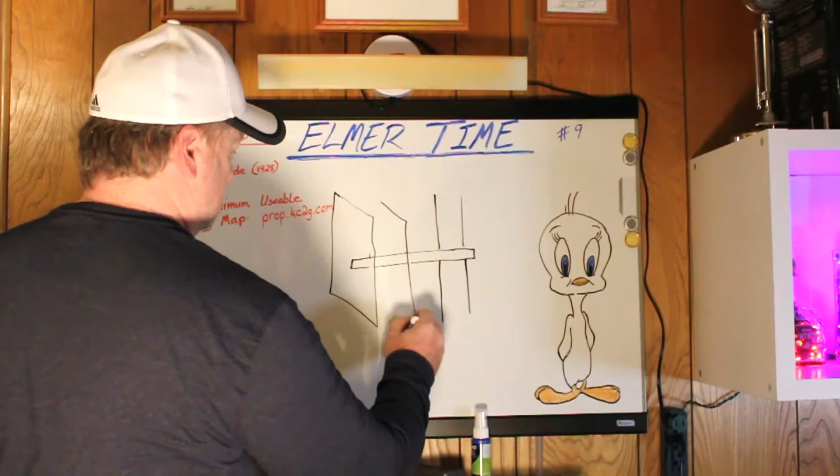Thus bringing up the gain, making it more sensitive to receive, and lower noise. Let's take these elements out. And let's just say it was, see, how would we draw that? Something like that.

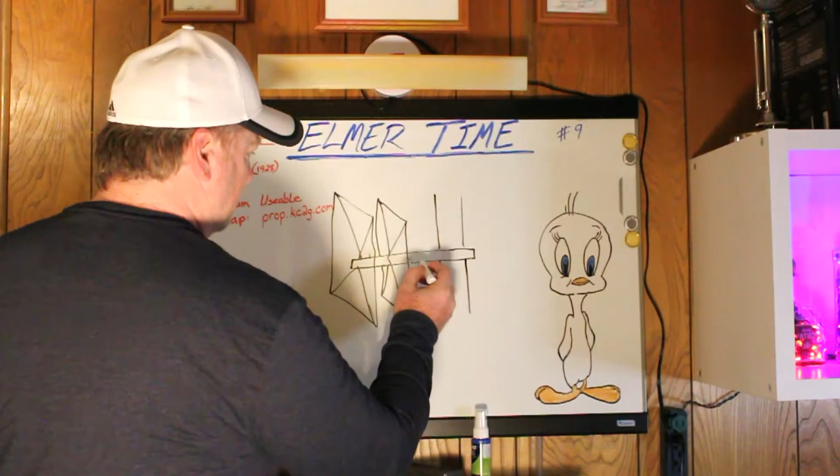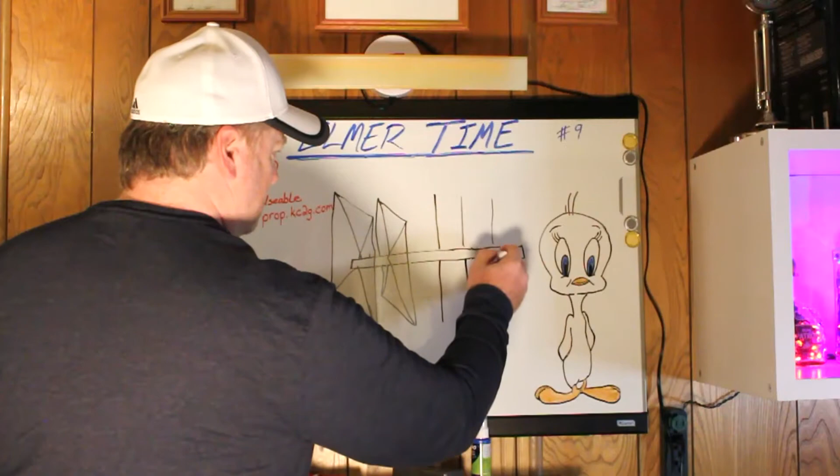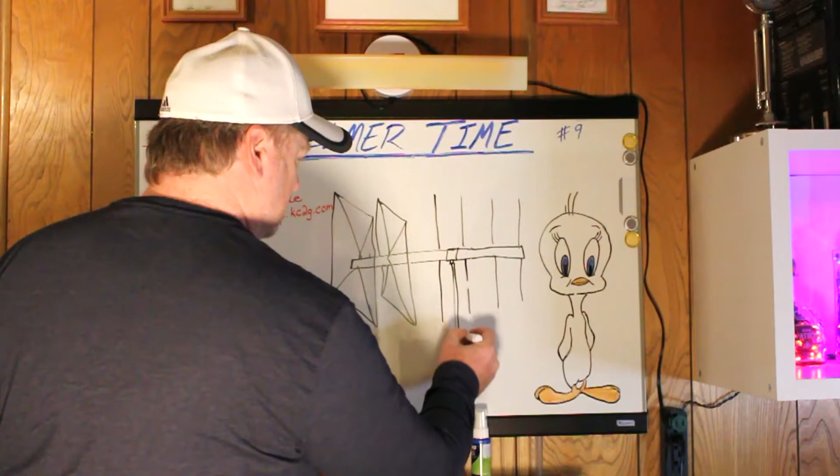Very easy to make, inexpensive. We can even make it longer. Let's make this with more elements, more gain, more directivity. What say you if we made a cheap one out of PVC, wooden dowels, copper wire, an SO239, and some copper or brass rods?

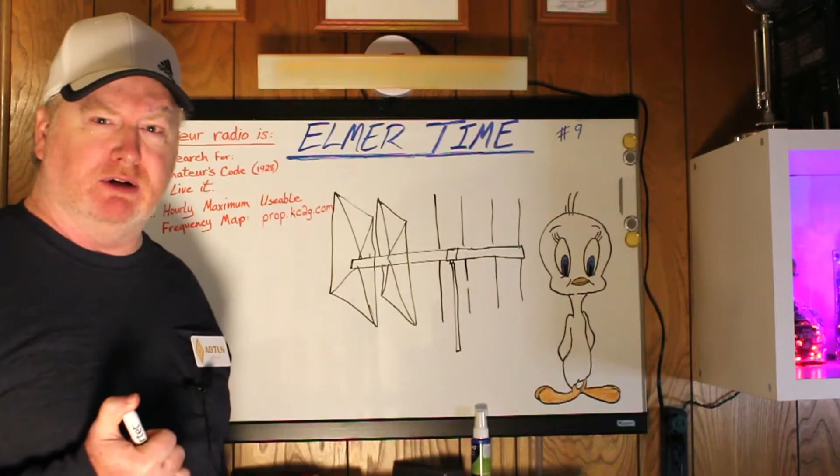Somewhere in the ballpark of 11 to 15 dBd gain, and it's less than 10 feet long. If you're interested, keep watching.

Well, how about we make a 146 megahertz 6-element side-fed Quagi. High performance, in less than 10 feet long, part quad, part Yagi, lower noise than a Yagi, higher gain than a Yagi.

Yes, it has a higher wind load, so you may not want to leave it out all the time, considering this is an antenna constructed of PVC, wood. But gosh, it's a great antenna. I made this antenna many years ago, and I had a ball with it. So let's start off with the construction of this 6-element Quagi.

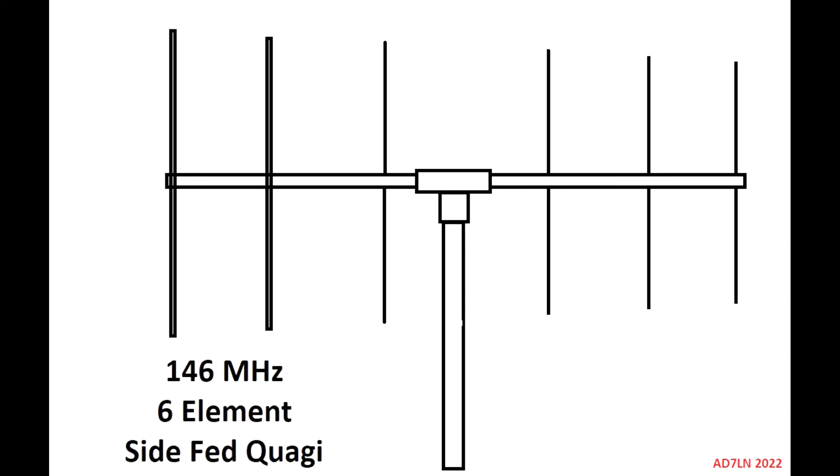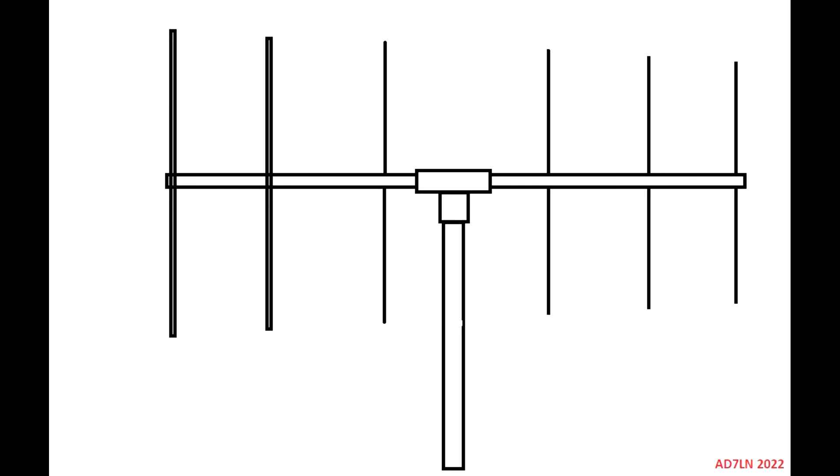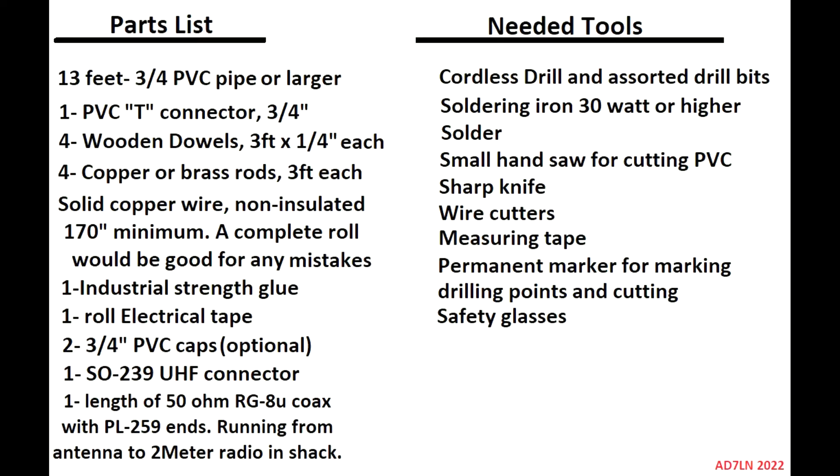Beginning, you will need a parts list. So here I have typed out everything that's needed for a parts list and the needed tools to construct the antenna. At any time, go ahead and pause parts of this video if you plan on taking notes or building this antenna. So let's move on with the next part of the slide here.

So starting off, let's cut the directors to their appropriate lengths. Whether you purchased copper rods or brass, they don't have to be very large in diameter. They can be less than a quarter of an inch round. Something that'll easily fit inside and through the PVC tubing during construction.

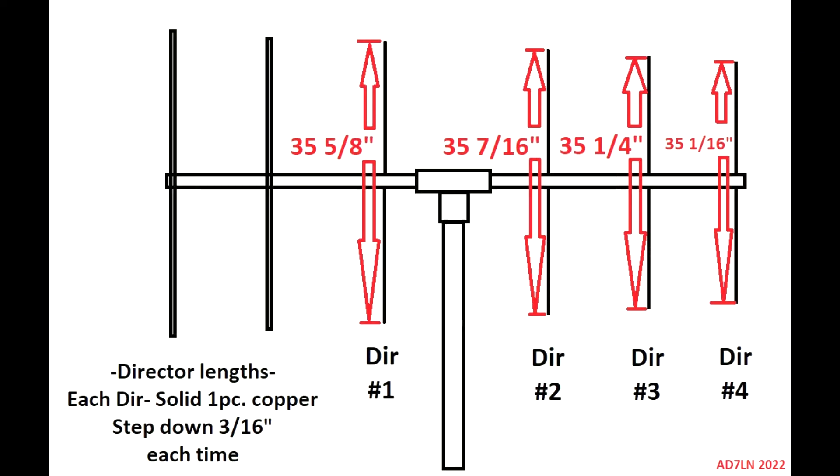Here are the lengths. Director 1 is 35 5/8 inches long. Director 2 is 35 7/16 inches. And Director 3, 35 1/4 inches. Director 4 shows 35 1/16. So once you have cut those, it'll be time to start making the driven element and the reflector.

And all these are just made out of solid copper wire, non-insulated, and you just bend the wire into a square. The reflector will be a closed loop, closed as in soldered together, and the length of the wire to make that reflector is going to be 85 3/4 inches long.

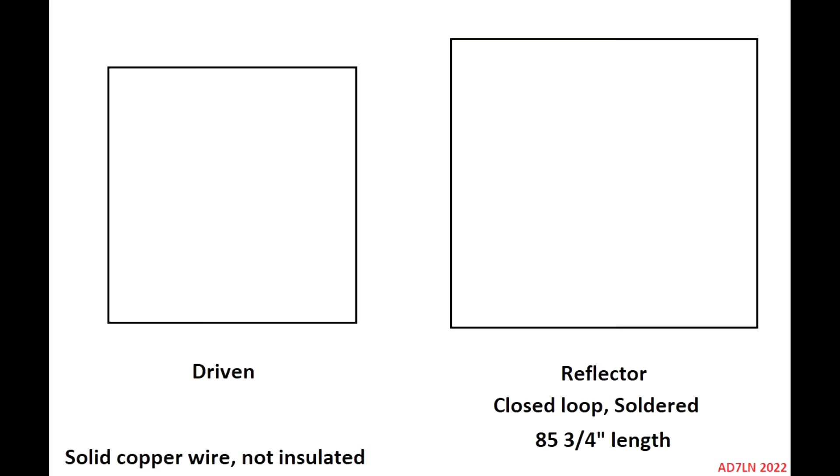And each side, shown in this next slide, is going to be 21.43 inches long. And they are exactly the same, 21.43, 21.43, 21.43. Once you have a perfect square, you will cut and solder and make a closed loop.

Once you've finished the reflector, move on to the driven element, which is 81 inches long. And the square becomes 20 1/4 inches for each side. And you will notice on the right side of the driven element, there's where you want to end and start the wire, because you're going to put an SO239 right there and solder the SO239 onto the wire. That will be your driven element.

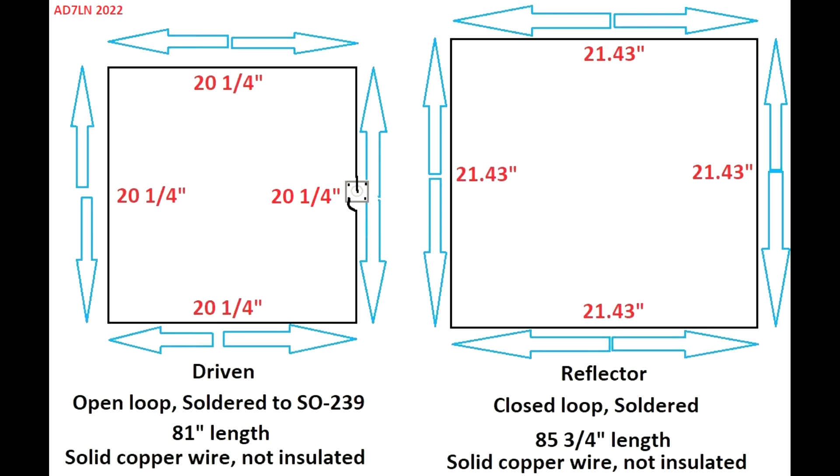And just to take a closer look at this, it shows the top wire is where you're going to solder the center conductor of that SO239, and the bottom wire that runs up to the connector, that will be the ground.

You will want to, during construction, put this on the right hand side of the driven element, so that once it's completed, you will flip it over, and the threaded socket will be on the left-hand side, facing you, because that's the way it's going to be further on as we get into this antenna.

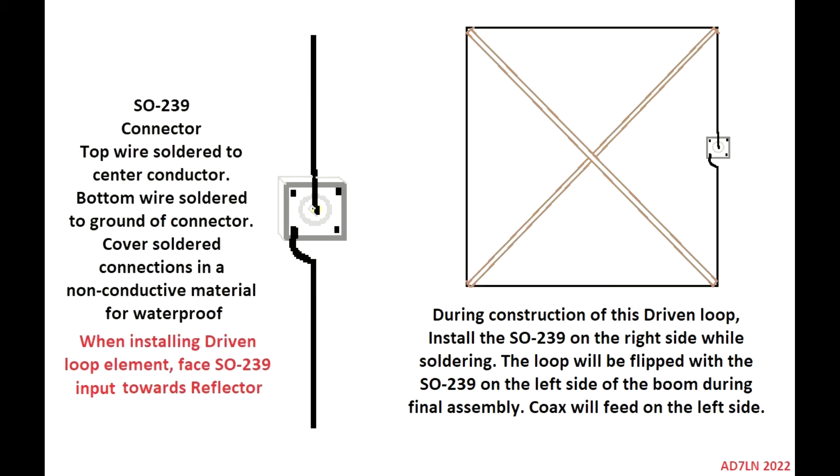So, next, we will get out the wooden dowels to make the supports for both the driven and the reflector. Cut down the dowels so that they are holding the wires perfectly without stretching the wire. And once you have them perfectly cut down, don't glue them immediately to the wires, because you need to install those dowels into the PVC boom of the antenna.

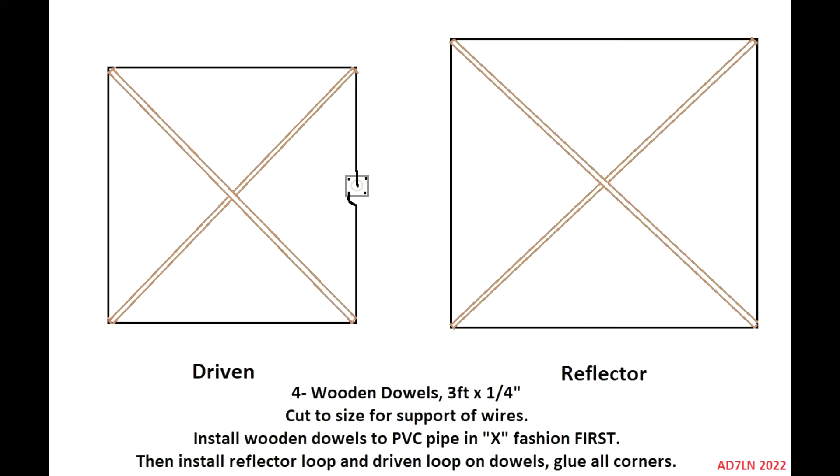Then you will put the wires on the wooden mast, or the wooden dowels. So next, we can start on the PVC itself. As you can see, you need to get out the T connector and then put in PVC on both sides so that it equals out to 112 inches. You may notice that one side may be a tad longer than the other, so do the measurements prior to cutting.

It also shows where the drill points are going to be. If you start off, let's say, on the right hand side, the number 4 director, you would drill a hole fairly close to the end, and that will be your starting point. And then 25 3/4 inches in, you'll do another drill point for director 3. Another drill point further in would be 17 1/4 inches. That would be director number 2.

And then between director 2 and director 1, you will have that space where the T connector is. So between director 1 and director 2, you have to make sure that once you have applied the PVC boom into the T connector, that you can drill the next point at 32 3/4 inches for your director 1. And then after you've done that, the driven is going to be 15 1/2 inches away from director 1. And then between the driven and the reflector, that'll be 20 3/4 inches.

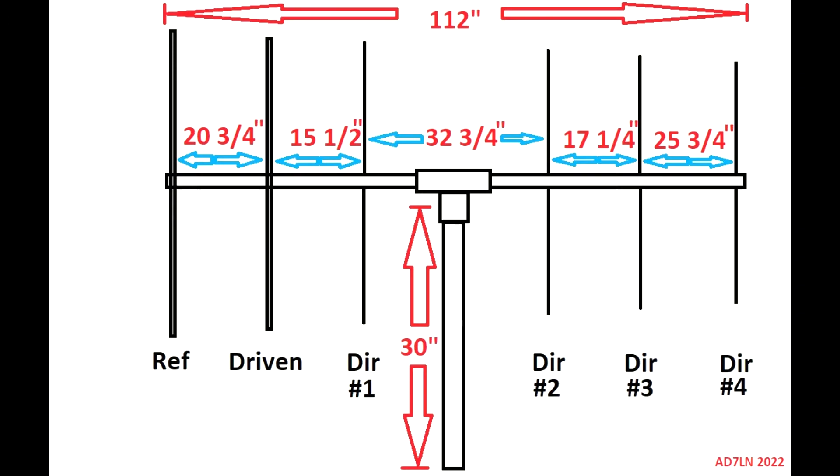And you should have some PVC piping left over to use as your mast to suspend or hold up the antenna once it's created. So from there, we can show you a little more in-depth on the drilling practice. You want to make sure that every director hole is straight in line with each other. For the directors to work properly, they have to be exactly in front of each other. So make sure you do your measuring and marking properly before drilling for your directors.

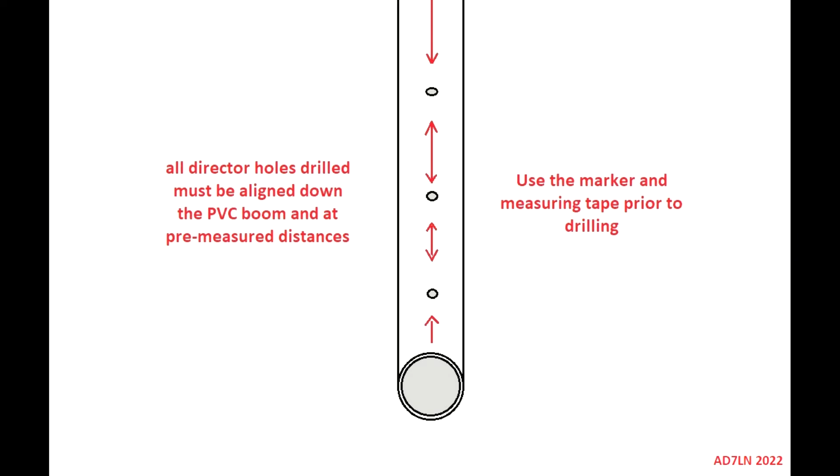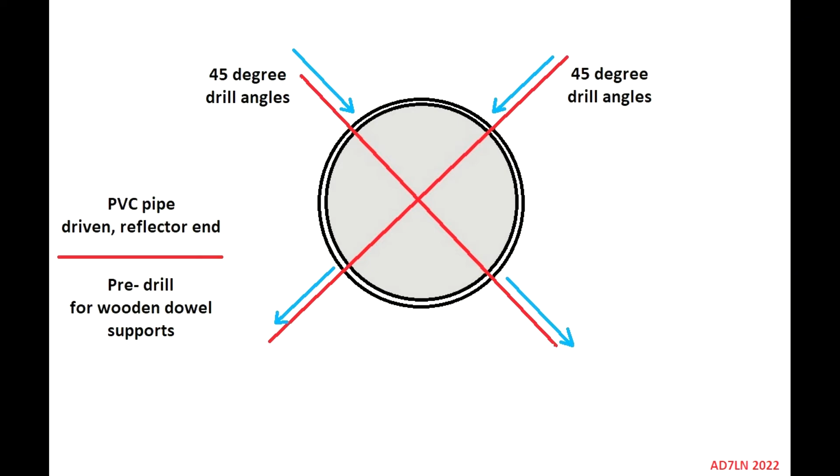And as far as the driven and reflector, you want to do a cross drill, 45-degree angles, so that you can install the wooden dowels through at an X angle. And you want to make sure that the drill points are going to be at an equal distance from each other. And take your time, do the marking and measuring, make sure it's proper before you drill.

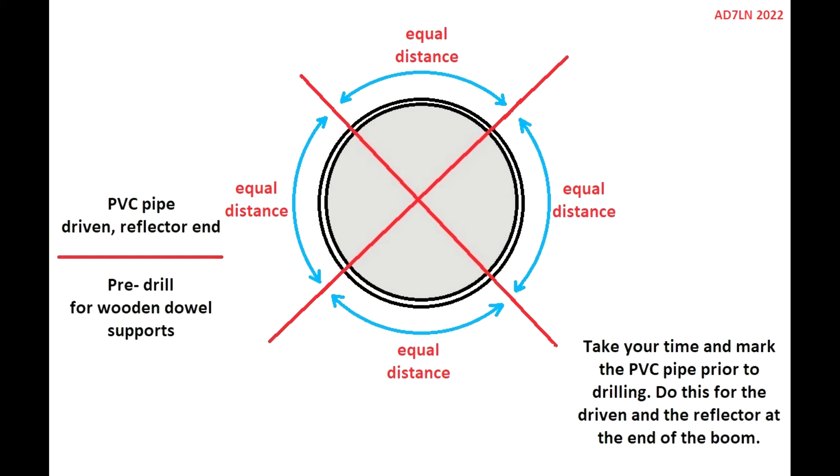And once you have drilled and installed the wooden dowels, and they are exactly set and protruding properly, so that there's the correct amount of wooden dowel on both sides, the same amount measured on all sides, you can go ahead and glue those dowels in to that boom.

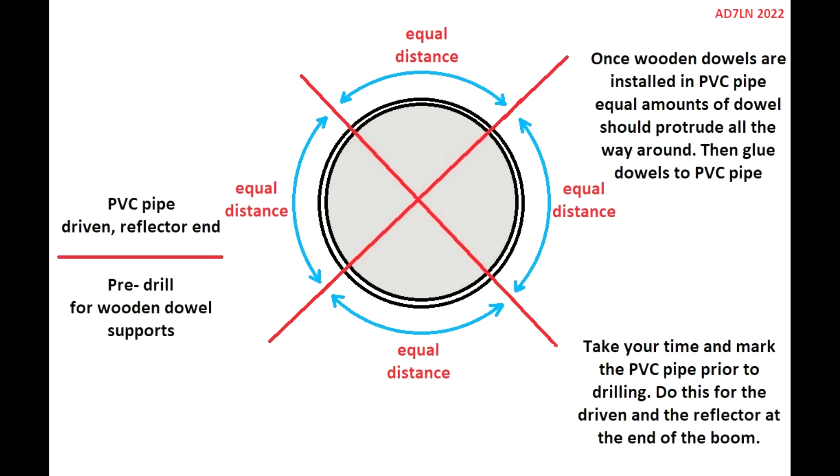And you'll see by this drawing that you will have to offset the drilling points by about 1/4 of an inch so that the dowels do not hit each other while sliding the dowels through the PVC boom. It's okay if they touch, but you have to allow some leeway so that they can actually slide all the way through the PVC boom. So do that for both the driven and the reflector. Once you have put those wooden dowels in, you can go ahead and install the wire for both the driven and the reflector at that time if you wish.

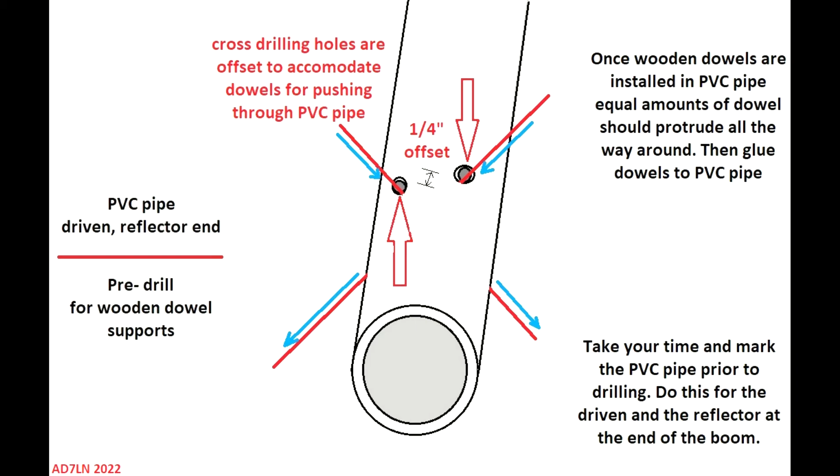And make sure while drilling PVC and installing each director, maintain an equal amount of radial on top and bottom of the boom. When adjusted properly, go ahead and glue each radial top and underside of the boom. And you'll see by this pictorial here, you'll have equal lengths of each individual radial prior to gluing on director 1, director 2, director 3, and director 4.

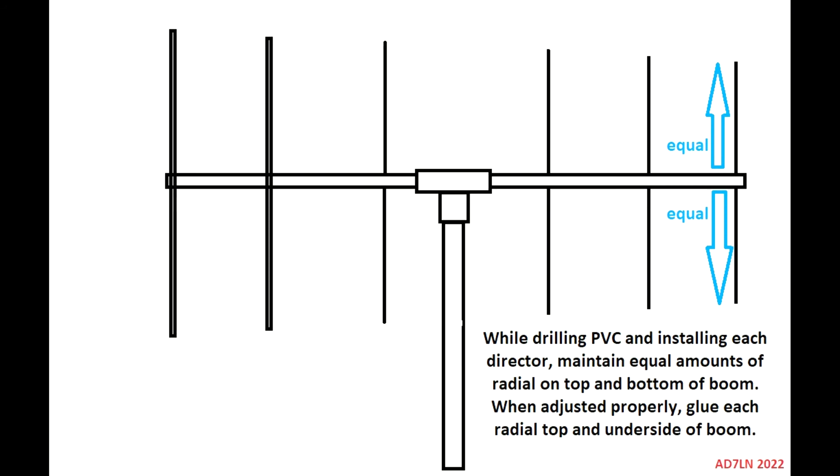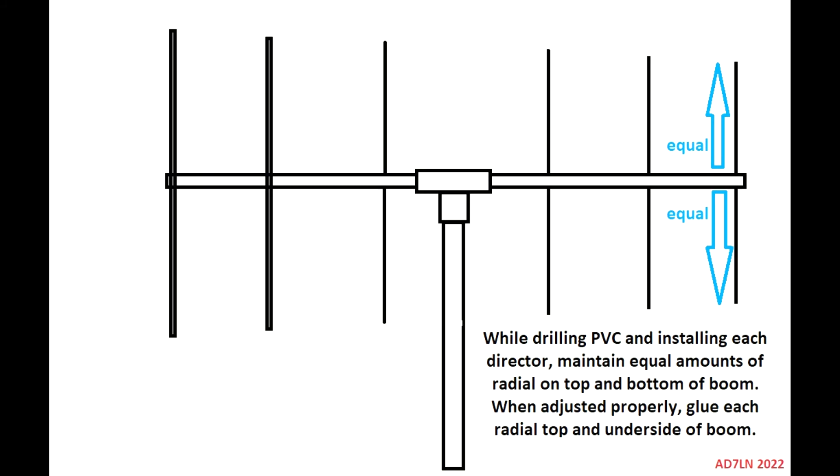Once those are glued in and you have the driven and reflector installed, you're basically done. Make sure that the SO239 is on the left side, and as you can see by this pictorial, the coax will run up the mast and down the boom and then curve around and come back onto the driven element and be connected. And the electrical tape will hold the coax, and the rest just shows how the antenna should look. And that's about it.

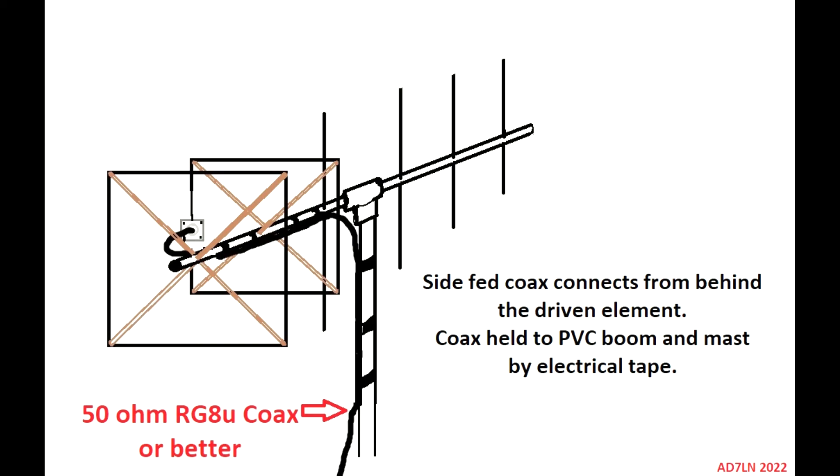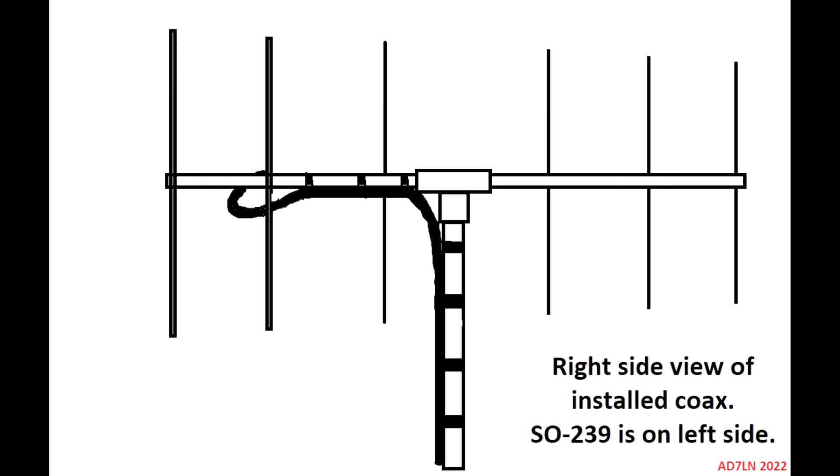Enjoy the antenna. Ham radio is an experimenter's world. Try adding elements. Try running it horizontal for sideband. Go ahead and experiment. It was a great antenna when I had it up, and I got some great distance at low power. And I'm sure you'll do the same.